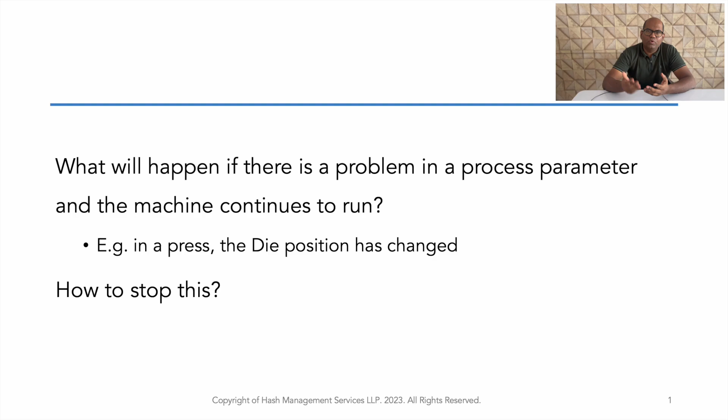Hi there, this is Anand, your trusted lean manufacturing implementation partner, and today in this particular video we are going to learn about Jidoka, a lean principle which helps the machine to have that intelligence to stop the machine whenever there is an issue. Come, let's get started.

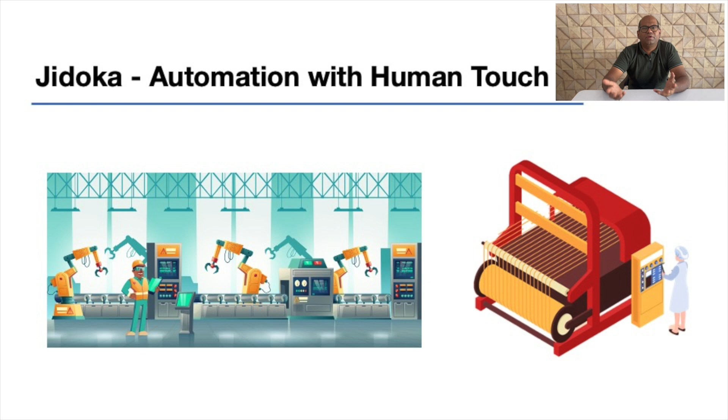Jidoka is a Japanese word which can be translated as autonomation. Autonomation means it's an automation with some intelligence or a human touch. See, a regular automation just repeats the process at a higher speed, or the machine will repeat the same activity again and again, even if there is a problem in the process parameter, or even if there is an error, right? But this autonomation or Jidoka means we are building a small intelligence in the machine in such a way that the machine stops, or it highlights, or it alerts the user that there is an issue in the machine, right? So that the defective pieces cannot be produced, the defects will be stopped. This is the whole idea of Jidoka.

This particular principle is introduced by Mr. Sakichi Toyoda. He is the founder of Toyota Motor Company. Before founding Toyota Motor Company, he was actually creating the looms, the Toyota power looms. Even today, Toyota's they have a big presence in the power loom industry or the textile machinery.

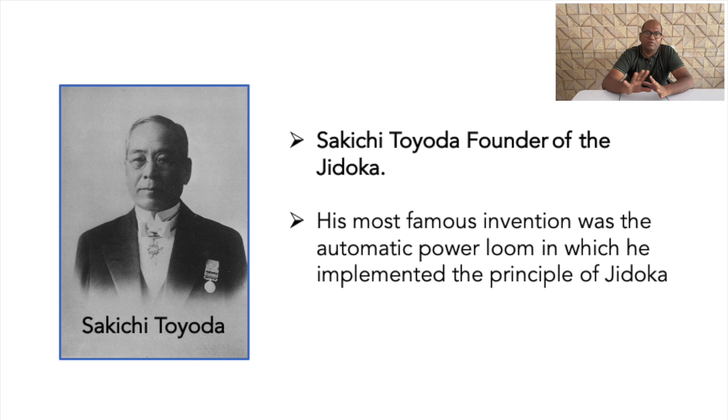Like I explained earlier, Jidoka is a lean manufacturing principle where the machine automatically detects a problem and it can stop by itself, or it can give an alert to the user. So this principle helps the operations to produce only the good quality products, because whenever there is a problem, whenever there is a process change, process parameter change, the machine will stop itself, right? So the defects will not be produced, there is no defects, so we will be getting only good quality products.

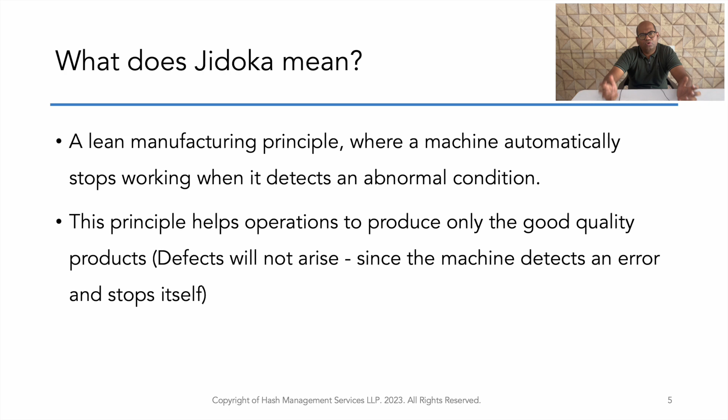So the history of Jidoka goes back to 1910s and 1920s, where all the hand looms were being converted to power looms, because at that time only the electricity was invented, and now it has started coming to the industry, right? It's more like an industrial age, I can say. So the power looms were flourishing at that time, and one problem with the power looms is whenever there is a thread, it breaks, the machine will be running only, right? So what happens is the fabric which comes out machine, it will be having a small defect where that thread will not be there, so there is a gap there in that fabric. So people used to cut the entire fabric and it will become a waste.

So every machine needs one person to monitor, right? So there will be operators standing in the machine, in the looms, and they will watch whether all the threads are there, right? So the fabric will be produced like that.

What Sakichi Toyoda did is he brought in a Poka-yoke. Poka-yoke means mistake proofing. So what he invented is whenever there is a thread breakage, right, the machine will stop. So what happens is a wrong fabric or a defective fabric will not be produced and the machine will be stopped. So now the operator can rectify the problem. He can bring the thread again, and now the machine can be started.

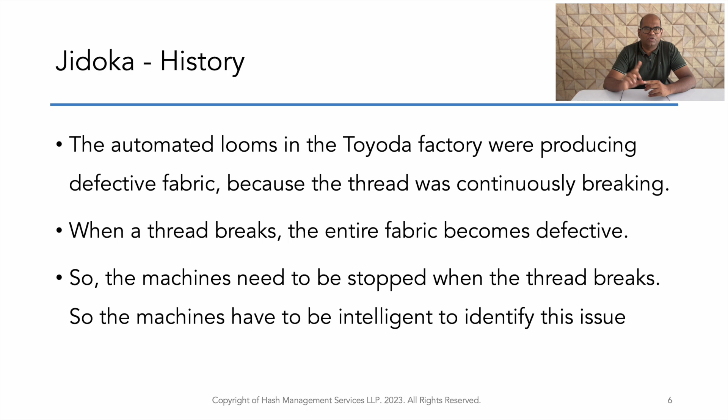Because of this particular small invention, one person was able to run more than 30 machines. It was very, very revolutionary at that time, right? And at that time, every person has to run one machine. But in Toyota's loom, because of Toyota's loom, one person can run 30 machines, because the machine will be running and one person can just do the setting change, and he can just monitor the machine. Whenever there is a breakage, the machine will stop. So only then the operator is needed there. The operator is not needed full time and just see the machine or check the machine, right?

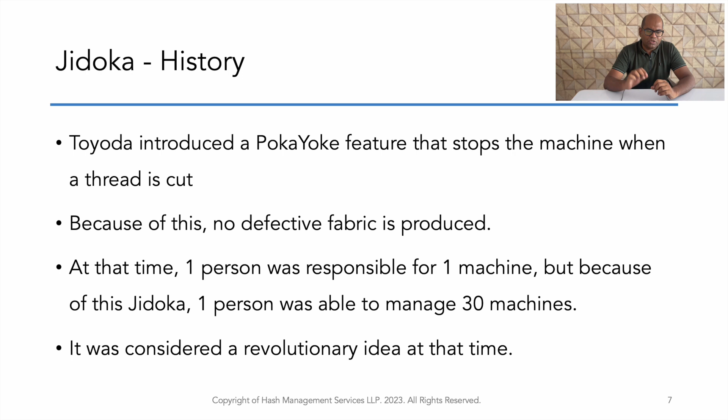So this is a big invention, and there was a global demand for Toyota's machines at that time. This particular invention increased the market share of Toyota's textile business, and with this money he was later able to start the automobile business. So that is the quick history of Jidoka.

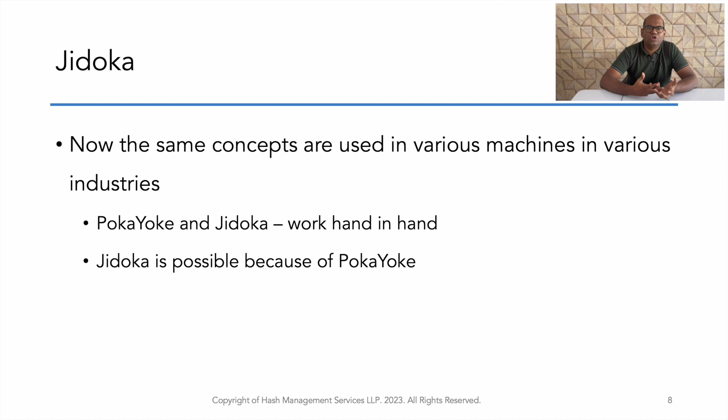Most of the machines we use now in industries have some form of Jidoka built into them. And Poka-yoke, or mistake proofing, and Jidoka work hand in hand. Jidoka is possible only with Poka-yoke. So Jidoka and Poka-yoke are not two separate concepts, they go hand in hand, and without Poka-yoke there is no Jidoka. Both are complementary principles.

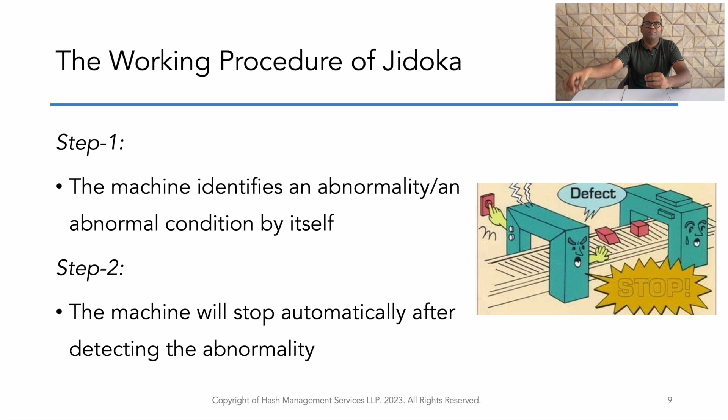I'm just going to quickly explain the working procedure of Jidoka. Step 1 is the machine identifies an abnormality, and Poka-yoke is used there. The machine learns that there is a problem. Then the machine will stop automatically after detecting the abnormality, and the operator has to fix the problem, and then the machine will resume operation. Once the machine is running, the operator will think about root cause analysis, corrective and preventive action, so that the problem doesn't repeat afterwards. So this is the quick working procedure of Jidoka.

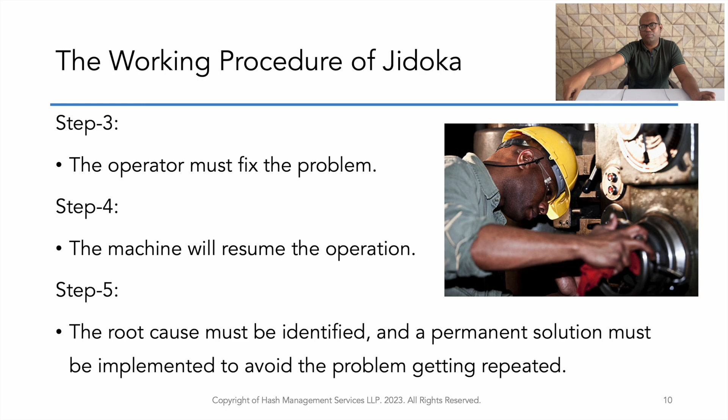Again, how the machine identifies the problem is based on Poka-yoke. The benefit of Jidoka is defects will not arise, and we'll get 100% good quality product. And because there are no defects, you don't have to put a lot of effort into inspection. Generally, in most Indian companies, inspection is also a big function, with a lot of manpower to inspect components. But consider this: when there is no defect, do we need to spend a lot of money and manpower on inspection? We don't need to. So Jidoka and Poka-yoke help you reduce inspection effort and manpower cost. Material waste will also be reduced, because since defects are prevented, you get more yield, and losses or scraps will be less. So these are the benefits of Jidoka.